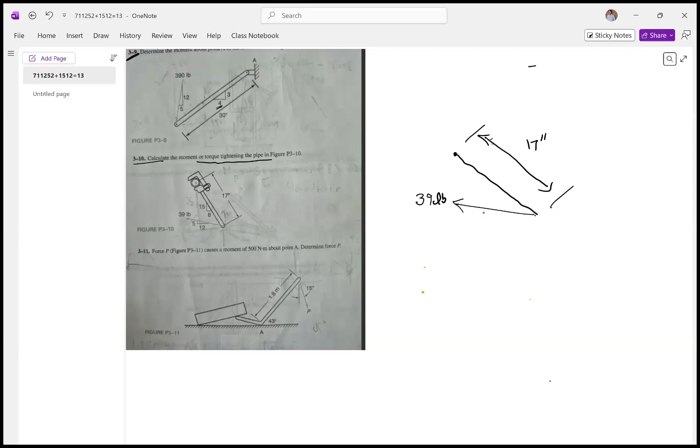I'm going to draw a free body diagram here. This distance is, the wrench is 17 inches. And the force being applied at an incline, this is a 39 pound force being applied at a slope of 5 to 12.

Now we're going to first draw the components of this force. One component, because this is the point where the force is acting, so I'm going to draw the components at this point, because only then will I be able to figure out in which direction the force is going to rotate.

This is the point. This is very important to understand. Although the force is being shown here, I will show it here. As long as the line of action is the same, I can show it anywhere. The idea is we will always point the arrow where the force is acting, at the point at which the force is acting, so that we can see which direction that force is going to rotate.

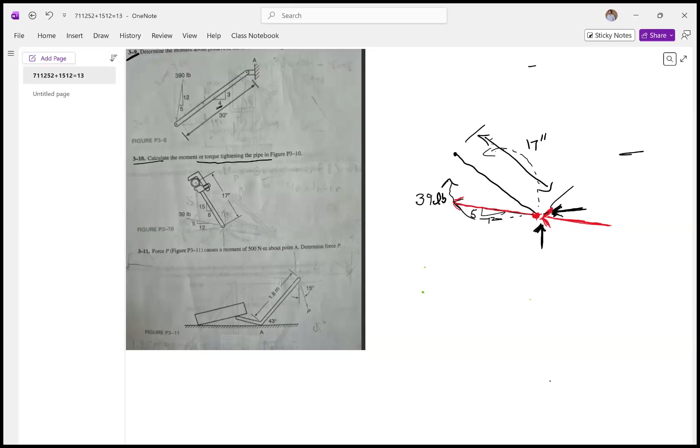So this force will have a component here, and a component like this. Now I can clearly see which direction these forces are going to rotate. If this is the vertical force, it will rotate it counterclockwise, and the horizontal force will rotate it clockwise. So the horizontal force is trying to rotate it this way, and the vertical force is trying to rotate in the opposite direction. That's why it was really important to understand where to draw the forces.

Now we just need to find the forces. So the slope is 5 to 12, and this one will be 39 times 12. The vertical force will be 39 times 5 upon 13, and the horizontal force will be 39 times 12 over 13. This is 12, this is 5, so this is 13. That's where we are getting the 13 from.

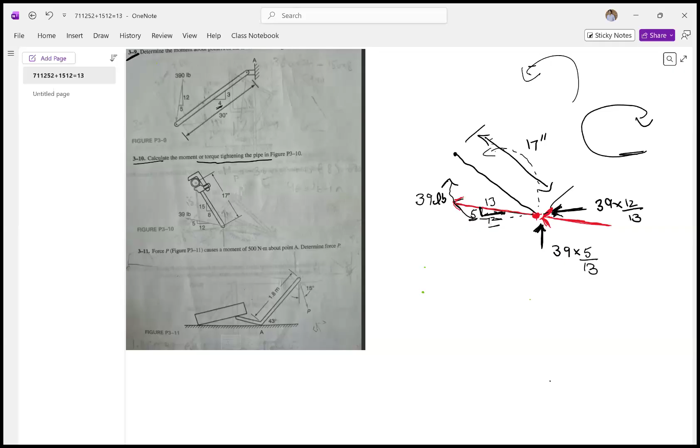This force comes out to be 15 newtons, and the other force comes out to be 36 newtons.

Now this distance is 17, meaning from the point here where the force is acting and from where the force is being applied, this will be 15 and 8. So obviously 15, 8, and this will be 17.

So the vertical components are very easy to find out for this distance, because this will be 15 and this will become 8. Now we just need to finish this question.

So this force is acting here, 15 newton, and this force is acting here, that is 36 newton. I will now write it as 36 multiplied by the perpendicular distance, which is 15, negative, because this is rotating it in the clockwise direction, plus 8 times 15, since the distance is 8.

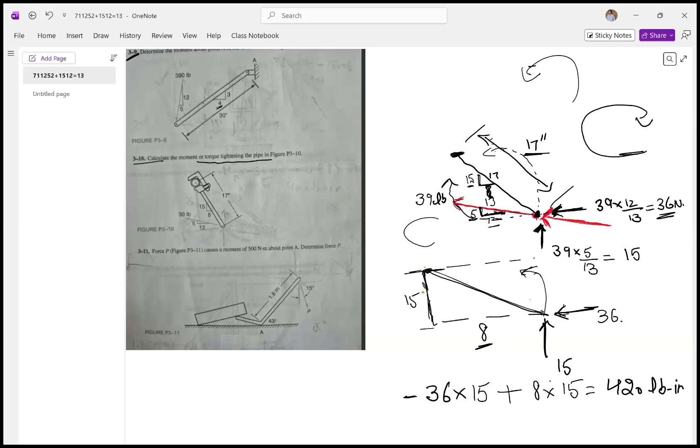This is rotating it in the counterclockwise direction, and that's going to give you the final answer as 420 pound-inches. So hopefully you were able to understand how to solve this question.

All right, now let's jump into the next question. In this one, we wanted to find out what is this force P.

Oops, let me just quickly check. Am I recording? Yes, I am recording.

I wanted to find this force P. Why can I not write here? This is the force I'm trying to find out. And again, I'm going to first draw the free body diagram for this question.

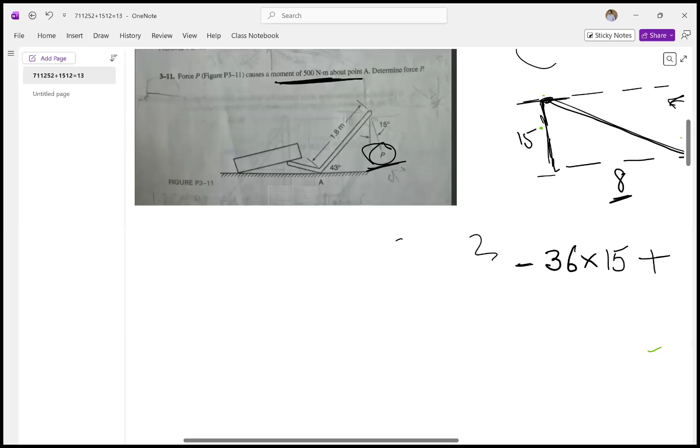We are given the moment of 500 Newton meter in this question about point A. So the free body diagram is going to look something like this, and I'll call it a free body diagram. All these diagrams are free body diagrams.

So this is P force, and this is acting at an angle of 15 degrees with the vertical. This angle is 15 degrees. So I need to find these components. So how is the equation going to look like?

Moment, which is equal to 500 Newton meter about point A, is given to me. The distance is 1.8 at an angle of 43 degrees. So first of all, this distance we can calculate, and this vertical distance we can also calculate. So the distances will come out to be: 1.8 cos of 43 degrees, which is equal to 1.316, and this distance will be 1.22.

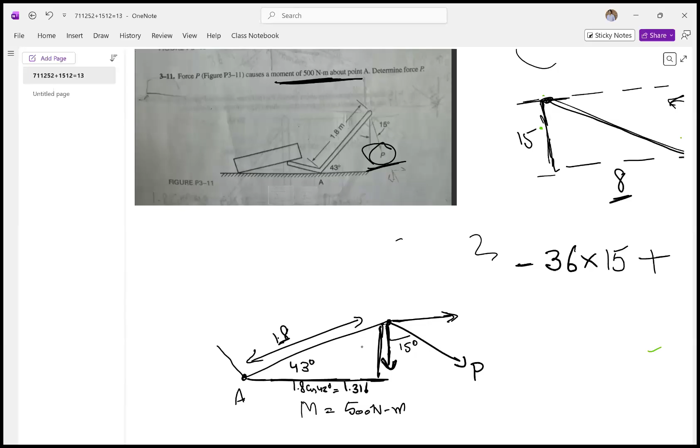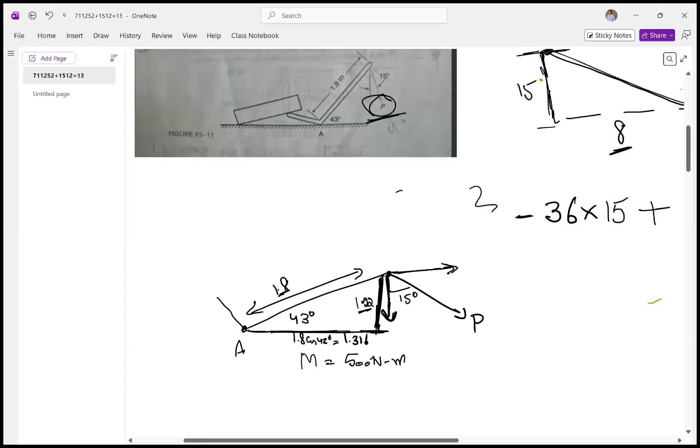So now we have these values, we just need to write the equation. Moment about point A: this is P, I'll call it Px, and this I'll call Py. So Px is trying to rotate it in which direction? In the clockwise direction. So Px will be Px times 1.22 with sine of 15.

Well, one second. So this, I'm calling it Px. So Px is equal to, actually I shouldn't write it like this. So what is Px? First of all, Px is equal to P cos of 15 degrees, and Py is equal to P sine of 15 degrees. That's what I'm going to write it as.

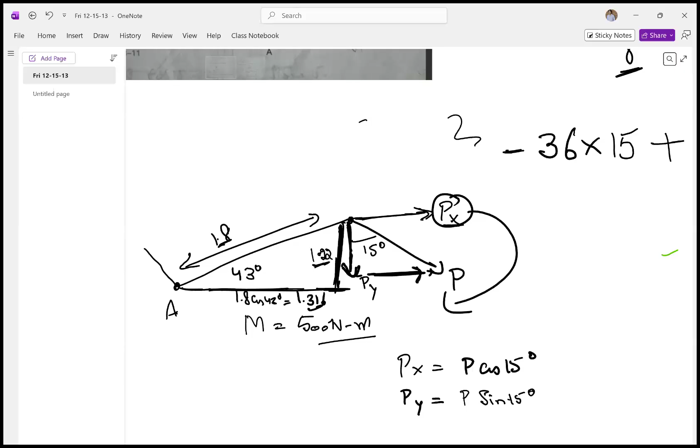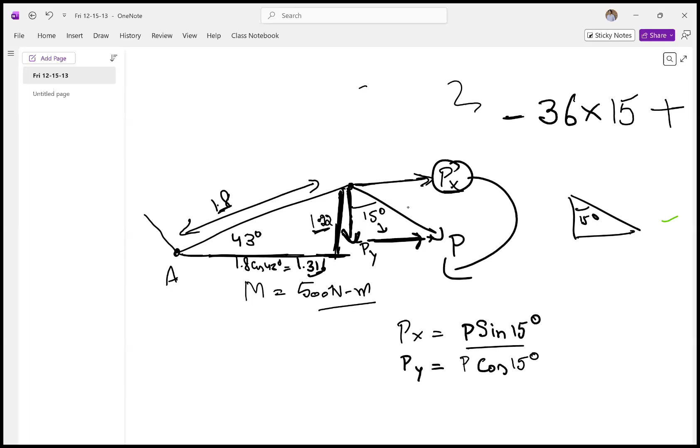So you can complete a triangle here, so this value is the same as this value, and you can apply trigonometry here. This angle is 15 degrees, and P cos of 15... this will come out to be, well, Px is P sine of 15. My apologies, it's opposite, because this is opposite - I was about to make a mistake. Px is P sine of 15 degrees, and here I will write Py as P cos of 15 degrees. So Py will be P cos of 15 degrees in this case.

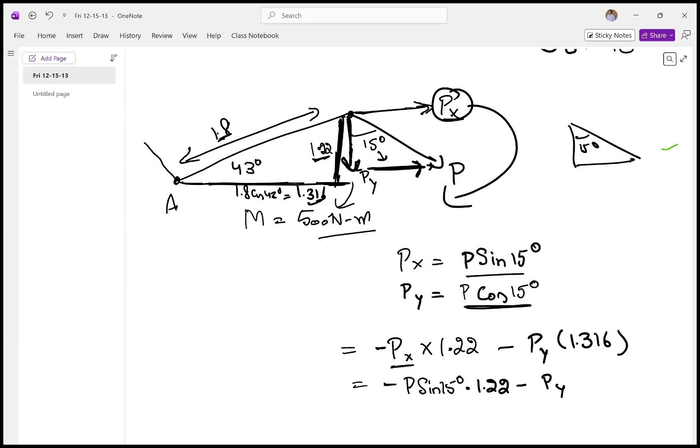Now I just need to write the equation. So Px force times 1.22, and this will be a negative value, plus - let's say the other one is plus or minus - the other one will also be minus, because this is also rotating in the negative direction. So: negative Px, which is negative P times sine 15 degrees, times 1.22, minus Py, times 1.316, and the value comes out to be negative P times sine 15 degrees times 1.22 minus Py, which is equal to P cos of 15 degrees times 1.316. You just need to do the calculation from here.

That's going to give you the value. So 500 equal to... once you solve this, you're going to get this as negative 1.586 P, and dividing both sides by 1.586, that's going to give you the final answer. So 500... oops, I cannot switch on my calculator now. Anyhow, this value will come out to be approximately 315.

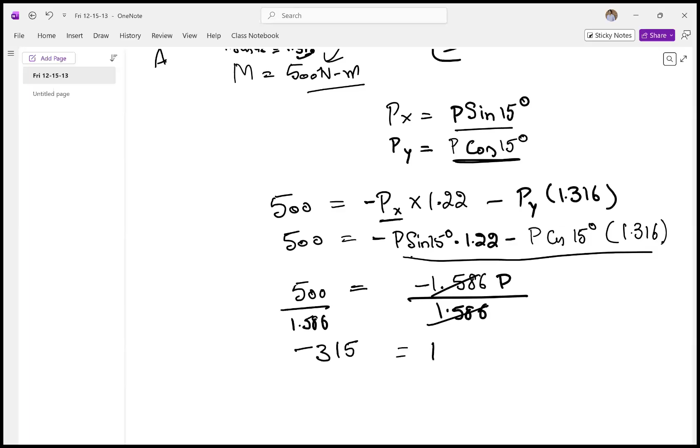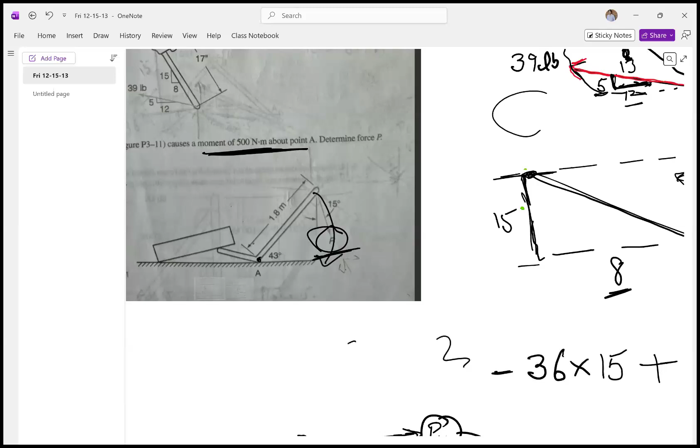315, negative. All right, well, the moment was in which direction? Let me just quickly go back and look into the question about point A. So this is trying to rotate it like this, so I will actually put the moment value as negative because the moment is acting as a negative. So the force value is 315.